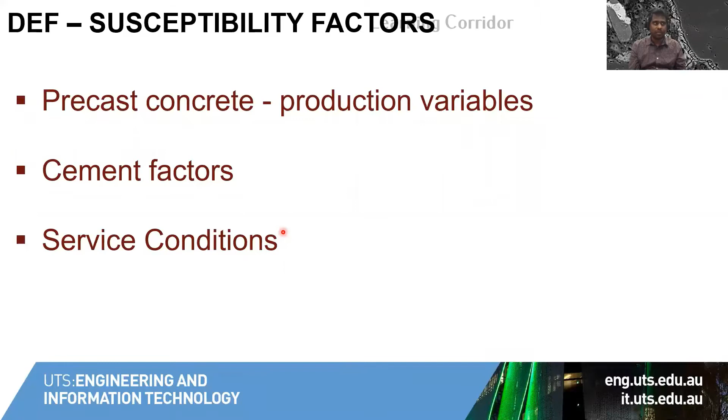Factors of delayed ettringite formation, we can majorly club into three categories. One is because of precast concrete production, all the curing regimes they follow in the factory. There are a few factors which can affect DEF there, and then the cement factors, and then the service conditions. So we will go through them one by one. First, we will see

precast concrete production, where we already know the curing temperature forms the basis for delayed ettringite formation. Other than that, the pre-cure time is a very important factor, because if the pre-cure time is longer, the concrete is in ambient condition for a longer time, which means ettringite will form in the system, and then that has to get decomposed by the high heat curing temperature.

Whereas if the pre-cure time is less, the chances are the concrete will get exposed to the high temperature at a very early stage. Because of that, the early ettringite formation may itself get inhibited. So there is no room for the ettringite to get decomposed in the system, which is more vulnerable than the ettringite decomposition reaction and forming back reaction. So the lesser the pre-cure time or pre-steaming time, the more the vulnerability of the concrete.

We already discussed the elevated temperature, and then the duration of elevated temperature curing, which is the steaming period. Here, the example is about, I think, 6 to 7 hours. More than that, exposing to a high temperature means more chances of decomposition of ettringite in the system.

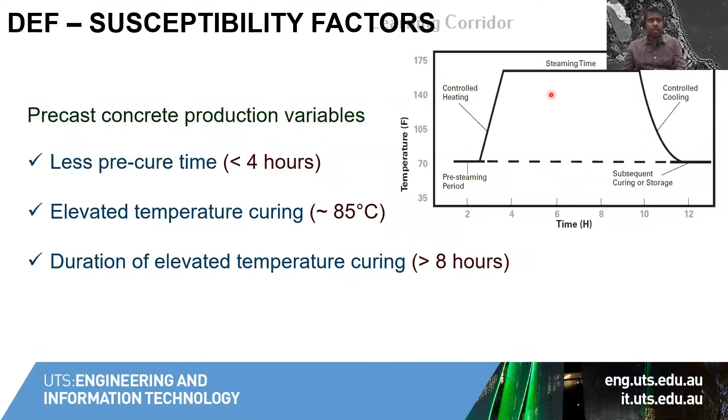in the long run. And then cement factors. As I already mentioned, ettringite is calcium aluminosulfate hydrate, which is composed of calcium, sulfate, alumina, and lots of water. So anything related to the alumina and sulfur content is going to impact the quantity. The quantity basically depends on how much aluminates and sulfates are present in the cement. We don't consider calcium, because calcium is always supersaturated in the cementitious system. So the quantity of ettringite precipitating depends on alumina and sulfates in the system.

And it's also about appropriate quantities. It's not that higher sulfate content means more ettringite precipitation. There should be an appropriate alumina content for the sulfates to react with. So the sulfate to alumina ratio should be around 0.8 to 1 in molar ratio. That's the specific content for delayed ettringite formation to occur and to be deleterious.

One thing which is not in this formula is alkalis, but they can also contribute to delayed ettringite formation. How? We saw earlier, the higher the alkalis in the cement, the more the chance of decomposition of ettringite or dissolution of sulfates. So alkali content is also very important.

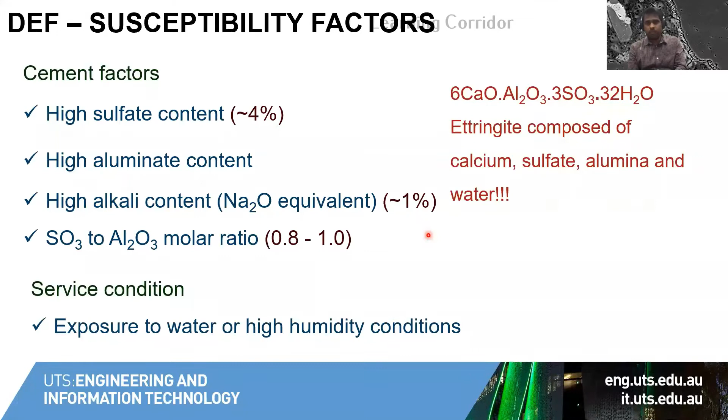And then we saw 3 examples. All 3 examples are associated with moisture exposure as well. Why? For DEF to occur in the system, the alkalis have to at least partially leach out from the system. Direct contact with water or high humid conditions will favor the leaching of alkalis from the system. So that is a very important factor.

But the good news is we need all the vital factors together to cause DEF-related durability issues. Say concrete made with high sulfate, aluminate, alkali cement that is steam cured at very high temperature for a longer time, and then the concrete has to serve in an environment where direct contact with water or a high humid condition is there.

So all three major factors have to come into place to increase the risk of DEF. Otherwise, if we can eliminate one factor, we are actually reducing the risk of delayed ettringite formation in concrete. Unfortunately, we cannot control the moisture conditions. For example, we can't say that in a coastal city we can't use precast concrete, which is not a practical solution.

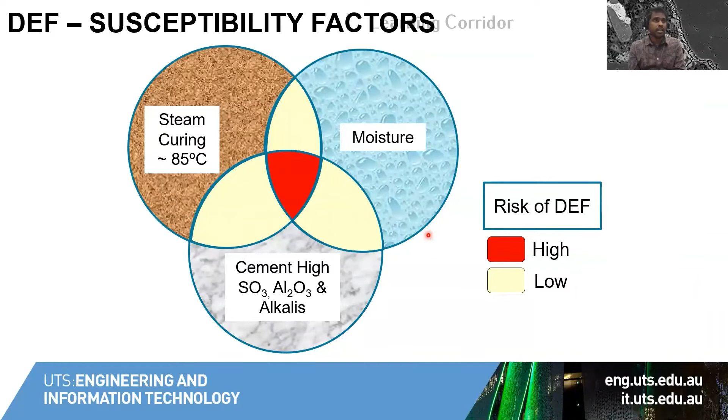So we basically don't have control over the environment. All the control measures for DEF basically try to control the steam curing and the cement chemistry. Standards actually restrict curing temperature. Here in Australia, different states can have different curing specifications, but more or less all the specifications restrict the curing temperature to 70 degrees Celsius. In some cases, for example Queensland, it also controls the core concrete temperature not to go beyond 75 degrees Celsius. So this is one way of trying to control DEF related issues.

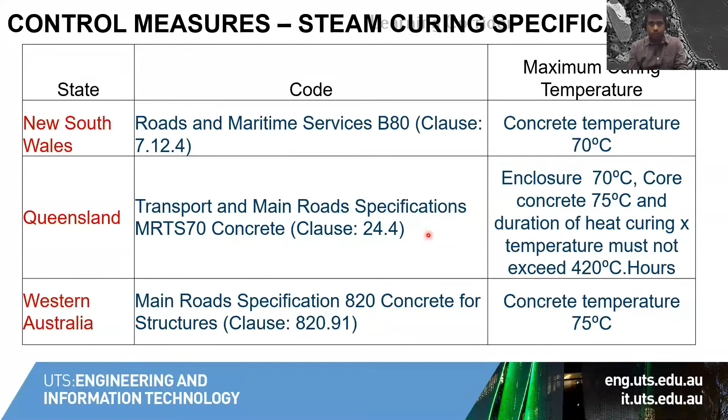Another way is to put restrictions on the cement sulfate and alkali content. In Australia, the sulfate content should not exceed 3.5%, and the total alkali content should not go beyond 0.6%. Cement standards also encourage the use of limestone as a mineral addition. Limestone substituted cements, in the long run, will produce other aluminoferrite phases which are non-expansive, for example monosulfate and monocarbonate. Those are non-expansive compared to ettringite. So limestone addition is encouraged.

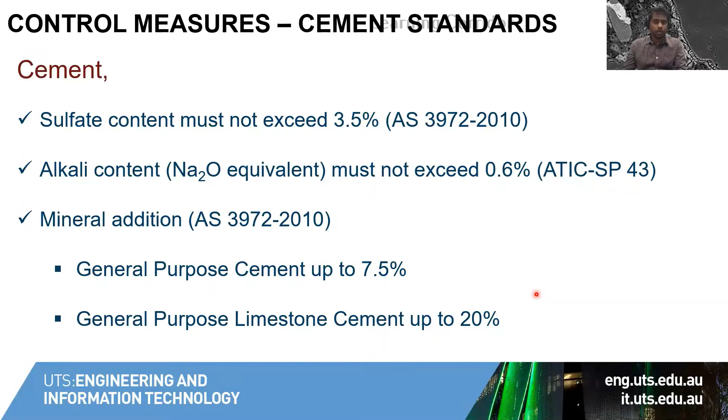Another way is the use of supplementary cementitious materials in concrete. SCMs like fly ash can partially replace cement in concrete. First, the sulfates and aluminates in the system get diluted because we are partially substituting with fly ash. But it's not only about sulfate dilution. Here on the left is an example without fly ash, where ettringite is precipitating along the aggregate and cement paste interface and causing cracks. Whereas when we partially replace with fly ash, even though it's heat cured, we don't see this precipitation, and there are no major cracks.

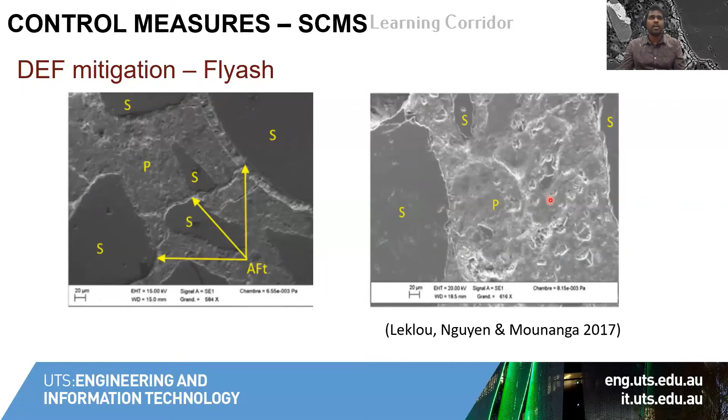So what contributes to this? Fly ash has a lot of amorphous silica, which can react with calcium hydroxide, portlandite, a porous hydrate in the cementitious system, converting it into more calcium silicate hydrate, a much denser hydrate, which makes the concrete denser. So what is the advantage? To precipitate ettringite, we need sulfates and aluminates to react with monosulfates. The movement of these sulfates and aluminates through the microstructure is restricted because fly ash concrete has a denser microstructure due to higher calcium silicate hydrate precipitation. So this is also one way of controlling delayed ettringite formation.

So to conclude, deleterious DEF occurs when cement alkalis, sulfate and alumina are at their pessimum levels, and such concrete is steam cured at very high elevated temperature. And during service, there should be access to water directly or indirectly to promote leaching of alkalis from the system, so that ettringite will precipitate back in the hardened concrete and cause problems. Once DEF forms, it may weaken the microstructure by producing cracks and make the concrete more permeable.

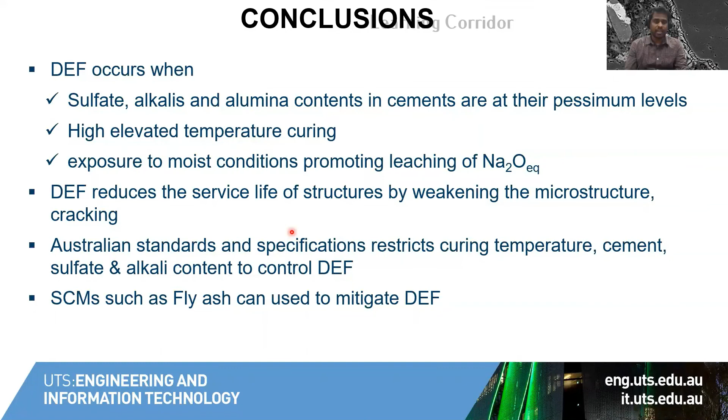So we can avoid or reduce the impact of delayed ettringite formation by restricting heat curing temperature, restricting the sulfate and alkali content in cements, or using SCMs, supplementary cementitious materials like fly ash, to mitigate delayed ettringite formation.